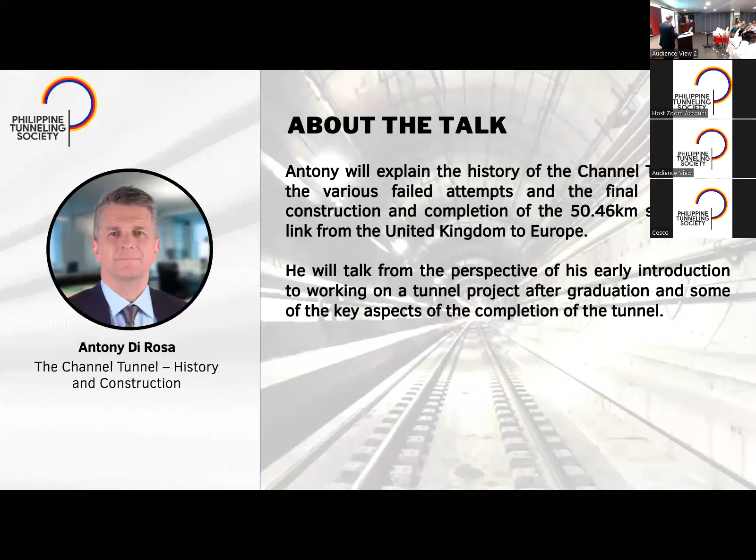That was my vision of the Channel Tunnel. A couple of platforms, a hole in the ground. So that's why I thought it didn't really require that many people to work on the project. Little did I realize the immensity of the project I was going on to. The scale of it, to this very day, it still remains one of the largest engineering feats of last century.

Right, just to give you a bit of an overview now. So it gave you an idea as well of how green I was when I graduated from university. Green, just like the Kent countryside, Garden of England, or as green as the jungles here in the Philippines. Very green and naive.

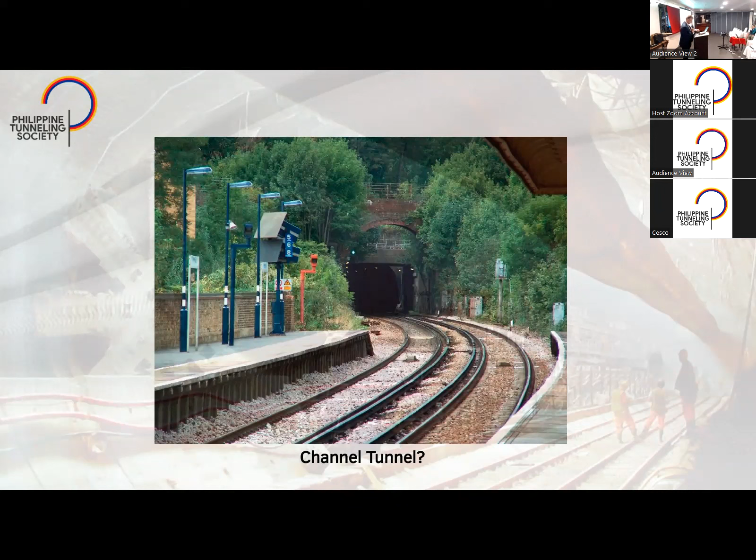For those who are not so familiar with the location of the Channel, it's actually an arm of the Atlantic Ocean, located between France and England. The closest point between France and England is about 33 kilometers, near Dover and Calais. It suffers from strong currents, which also affect the ferry crossings in adverse weather conditions. It's a pretty tough environment to sail, and it's been a focus of attention in terms of bridging between mainland Europe and England for trade purposes.

The top left-hand corner gives you an idea of the shipping traffic that goes through there. About 600 cargo ships and about 60 ferry ships travel through on a daily basis, not to mention the tourist boats that go out on the weekends. So very heavily trafficked and impacted by the adverse weather conditions. Top right gives you an idea of the proximity between France and England. You can actually see across the water on a clear day. It's just a matter of going underneath it.

And in 1909, bottom left-hand corner, Mr. Blériot flew across the Channel. And you get the occasional people who like to swim it as well. That's a bit of a personal challenge. That's not me, I can assure you. The other means of transport was the hovercraft as well.

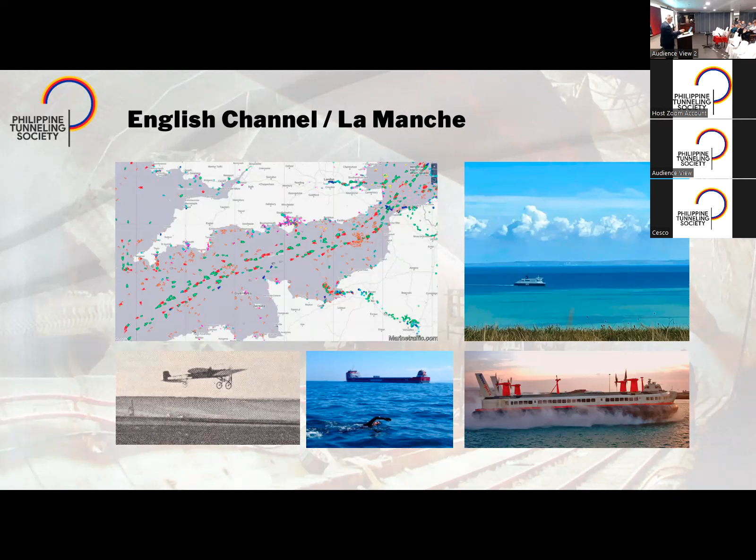Right, so on to a bit of history now. It's been a project that has been in the minds of people for a few hundred years now, dating back to as early as 1750, with the Academy of Amiens that launched a competition. It was won by a French engineer at the time, but nothing actually came of it. It sort of died a bit of a death.

1802 was the next one that was tabled, and this was to actually dig a tunnel underneath the channel, under the seabed, with horse-drawn carriages. And there were going to be two tunnels. One tunnel to deal with the traffic, and the other tunnel underneath to accommodate the water that would be seeping into the tunnel. Wild? Maybe not. I don't know.

Anyway, that was proposed and presented to Napoleon, but I think at the time there were still a few differences between the countries. So I think England felt quite exposed. You have to think as well that this channel represented a good line of defense to the country itself.

1856 was the next one. That one took on the same principle as before. It was going to be two tunnels. And the solution was going to be proposed where there'd be a meeting on an island between France and England. That one, if I'm not mistaken, was backed by a number of the banks, the Rothschilds, and thousands of investors, and was actually, well, actually, there was the next one.

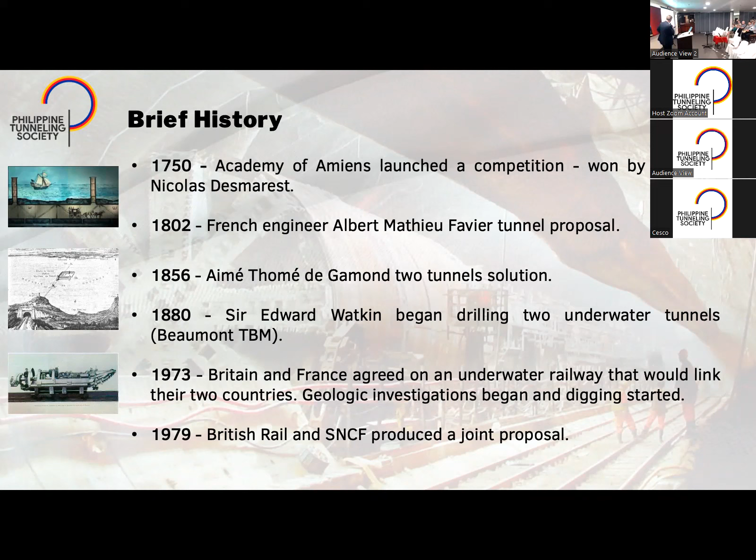Then there was another attempt in 1979. The two national railway companies put themselves together to propose a solution, but that didn't materialize either. So there have been many attempts over the years, but eventually in 1984, the British and the French governments decided that they really needed to get something built in order to improve the trade between the two countries.

So they launched a competition. There were 9 solutions presented. 4 were shortlisted, and the eventual winner was what was called Eurotunnel, the group called Channel Tunnel Group and France Manche SA. And that was the solution of the tunnel for the train and shuttles. There were various other solutions: a suspension bridge, a combination of bridge and tunnel, and a tunnel which was a road and a railway.

So in 1986, the Treaty of Canterbury was signed, and that effectively laid down the legal, financial and administrative basis on which the project was going to move forward. One of the key things here is that there was going to be no government or public funding whatsoever. So this had to be entirely privately funded.

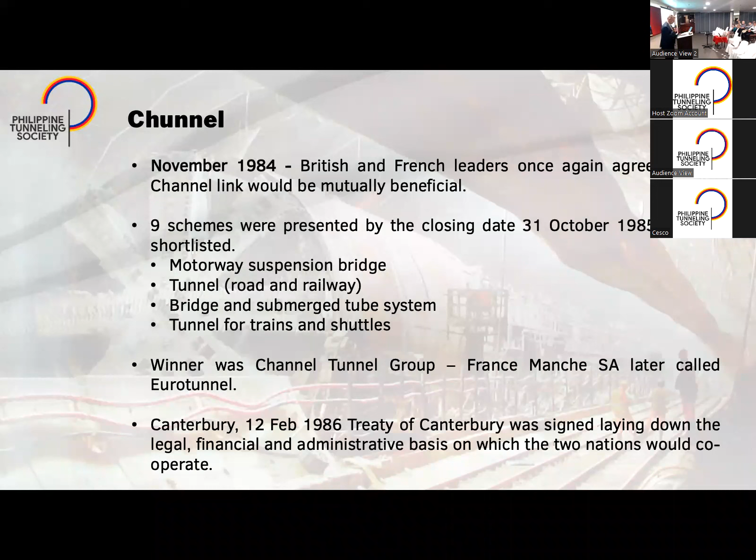So, the project location now. As I indicated before, the project is located between the northwest of France and the southeast of England, Kent and the Pas-de-Calais, fundamentally different in terms of their geographical layout and topography. Northwest of France, fairly flat. And from a population perspective, it really wanted to attract the tunnel to that part of the world, because they saw it as an opportunity to create employment. There were high unemployment rates in that heavily industrialized area, and they wanted something like that to regenerate the industry.

Southeast of England, in contrast, was fundamentally different in that it's hilly, there are cliffs, as you can see from the pictures here, the White Cliffs of Dover, and Kent is called the Garden of England, and you'll see from these pictures that there is a good reason. It is a very picturesque county, and it was heavily opposed for a variety of reasons. One was the threat to the ferry industry and the people employed in it. They felt they were going to be undermined. The other was the environmentalists, because they envisaged that this tunnel was going to destroy the beautiful English countryside.

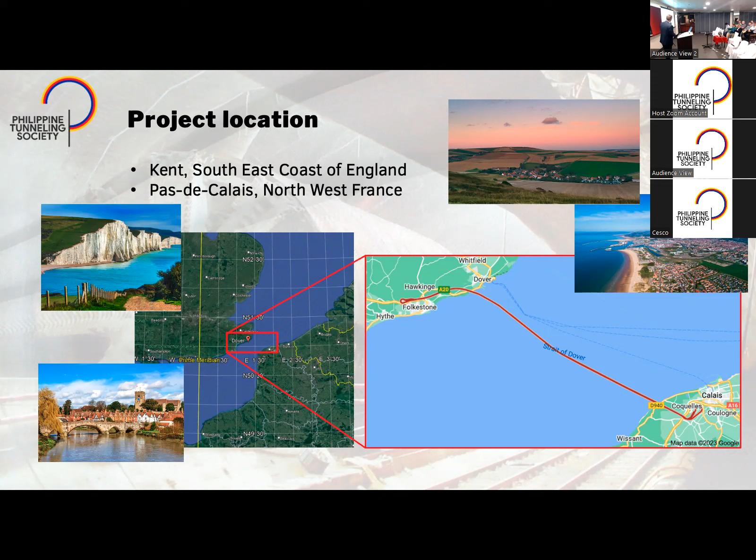Okay, so the winning group was the Eurotunnel group, which had to be primarily an Anglo-French cooperation, since both governments were supporting this. They had to get French and English banks, as well as the contractors from both sides of the water.

So originally, the group was one, and they eventually realized that they had to separate the owner-operator from the actual contractor because there was a potential conflict of interest. So what happened then was the creation of the Eurotunnel group, which would be the ultimate concessionaire for 55 years initially. And the actual contractor was a series of contractors from France and England: Translink from the English side and Transmanche from the French side, giving TML, Transmanche Link.

They were overseen by the Intergovernmental Commission Safety Authority. They were there to primarily make sure that the safety standards, the design, the operational aspects were respected. And so they also employed the maître d'œuvre. The maître d'œuvre is effectively the engineer, to make sure that the technical requirements were actually met, bearing in mind that this is a design, build, operate, and transfer project. So it was designed progressively as the project went along.

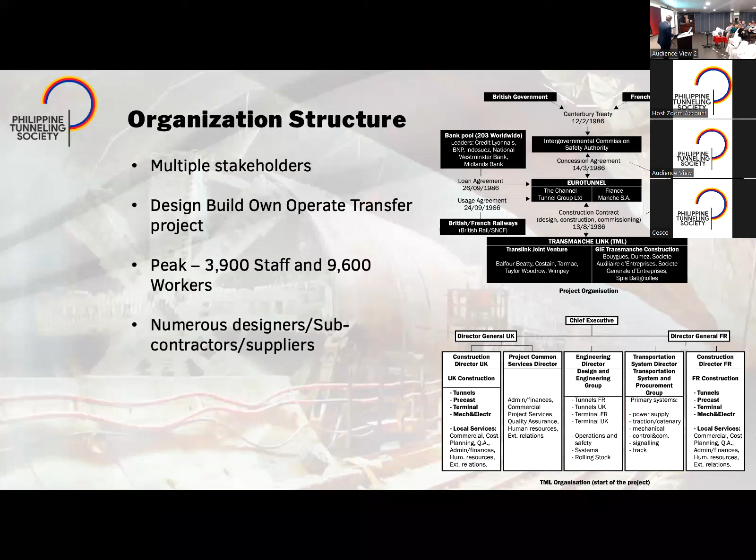I started in 1987. It was still a very small organization, and it gradually grew after that into this enormous project. And as you can see, there are numerous stakeholders, numerous interfaces, numerous interests that had to be maintained progressively as the project went along, and obviously that was part of the challenges of the day-to-day we were having to deal with. I was a young engineer, so my main focus was primarily on-site, with the theodolite, working with the subcontractors and the contractors. So I didn't have that level of contact at the higher levels anyway.

So in terms of the actual tunnel itself, I'm going to ask you to pay attention because I'm going to ask you a question later on. Well, I'm going to challenge you and see whether you paid attention.

The tunnel itself is the third longest tunnel in the world, after the Gotthard tunnel in Switzerland and the Seikan tunnel in Japan. However, it does hold the record for the longest underwater section. So the key thing to remember here, it is not in the water, it's not suspended in the water, it's actually under the seabed, running through at anywhere between 45 to 115 meters below the seabed. The deepest section of the channel is the Fosse Dangeard, 85 meters deep, which is above the line of the tunnel itself.

The geology that was really identified as the ideal tunneling medium is a chalk marl, which is effectively like a chalk, but with traces of clay and silt in it. Ideal for tunneling. The English side suffered less in terms of fissured rock and water ingress, but on the French side, there were actually incidences of water ingress and high pressure, which had to be dealt with. Hence the different tunneling methods used on both sides. On the English side were open face TBMs, whereas on the French side were EPBMs.

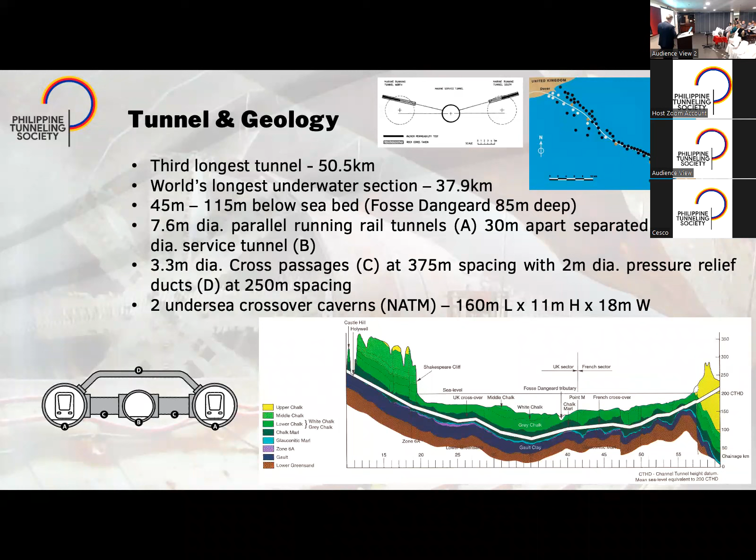Right. In terms of schedule, when you realize what was actually built in this time, the immensity of it, not too dissimilar to some of the projects being talked about at the moment in Manila, like the North-South Commuter Rail, in terms of 7 years or so. This was actually built in 8 years. So here we're talking about design, procure, build, test and commission, and then a fully operational tunnel system at the end of it.

And I had the fortune of working on it from 1987 through to 1994. Key thing to look at here is the overall layout of the transport system. Left-hand side, you have the Folkestone terminal, which is where the shuttle trains loop around, come and unload and load the vehicles, the trucks, passenger cars, and so on. Shakespeare Cliff was effectively an operational area that was used to start the tunneling seaward bound and also landward bound. Moving along, you have the crossovers in the tunnel.

Sangatte shaft, which was the equivalent of Shakespeare Cliff but on the French side, slightly different configuration and setup, but it was also the operational shaft from which they did the tunneling seaward and landward. And then the Cocquelles terminal, which was effectively the same as the Folkestone terminal, except that here this was more in open land.

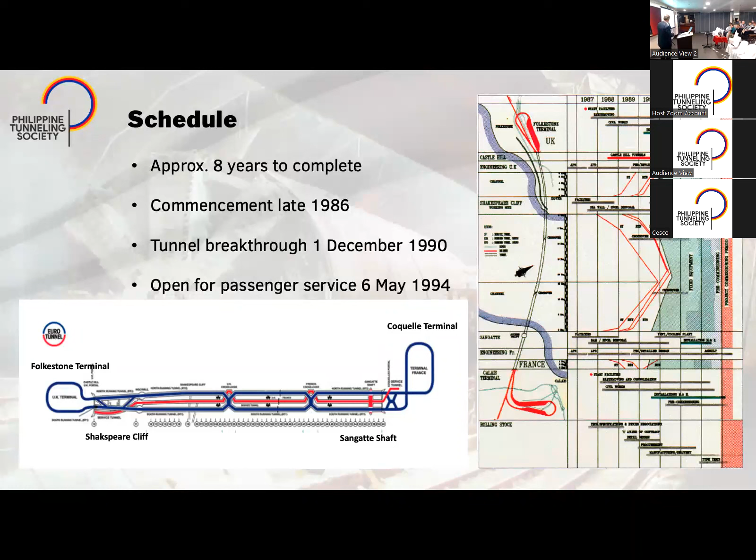Okay, so one of the key aspects that really made the success of the project, apart from the tunneling itself and the crews, was the supply chain, and that is paramount in these types of projects: to make sure that your supply chain is on top of the game and it's not holding up the TBMs.

The tunnel segments were fabricated in two areas, one on the English side at the Isle of Grain, and the other one in France near the Sangatte shaft. I'll go to the French one first. Sangatte was probably easier to build the facilities because of the lay of the land. It was very close to the shaft. You didn't have that many logistics issues in terms of transporting the segments to the tunnel. Whereas on the English side, the challenges were a bit greater.

As I said, Southeast England: hills, tight spaces, cliffs, and so on. Very difficult to have a setup like you can see on the top right-hand corner, which was the Isle of Grain facility, 8 production lines producing over 1,000 units a day. So it was decided to make use of the available land of the Isle of Grain. Aggregates were shipped from Scotland by ship, and then the segments, when they were constructed, were transported by train, because adjacent to the site itself was a railway line.

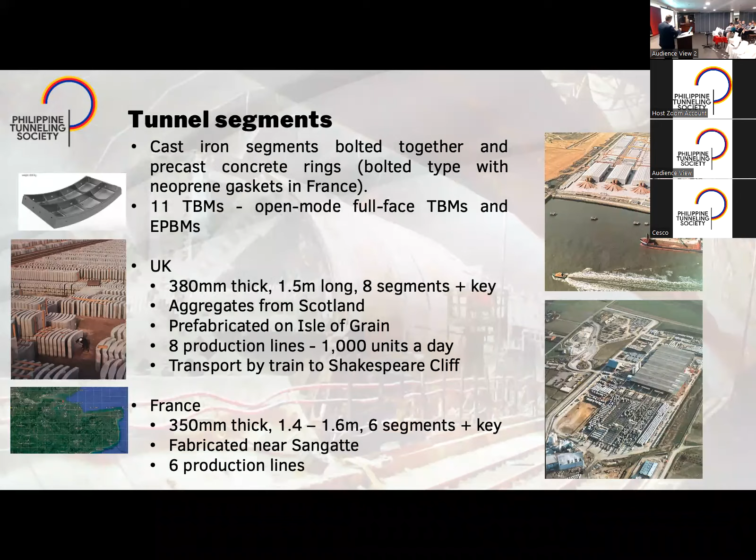The two main operating sites that I highlighted earlier on were Shakespeare Cliff and Sangatte. Shakespeare Cliff made use of the original site that had been set up in the 1880s, which had partly been created to do the original tunnel dig, and then was subsequently also used for the 1974 one.

But this had to be expanded because of the amount of space and equipment that had to be used and delivered to the site, meaning that at Shakespeare Cliff about 1.8 kilometers of land in length was recuperated. A seawall was built, and the tunnel spoil was used to fill this site to then build the pit head above the ground, as you can see there, top right-hand picture. Top left-hand picture is Shakespeare Cliff during the earlier stages.

The top of the cliff was the site offices. To the right-hand side of those site offices was the accommodation for the workers. Thousands of workers working on the project; they needed to be within close proximity of the tunnel. From a logistics point of view, those going from the top of the cliff accessed the tunnel through a shaft about 115 meters deep. So it's a complex underground system, interwoven tunnels that had to deal with ingress of materials, plant, movement of trains, spoil removal. It was a very impressive structure.

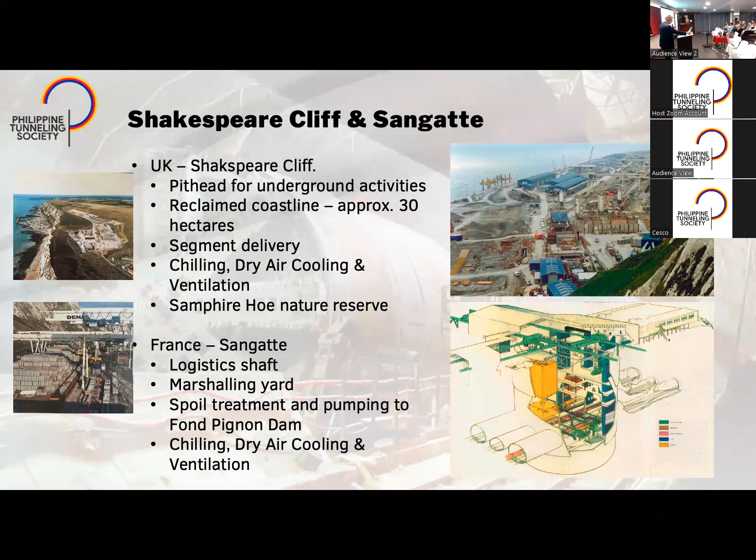You may recall I mentioned as well the Folkestone and Cocquelles terminals, and these are effectively the terminals located at either end of the network for this transport system. This is where the vehicles were loaded and unloaded, and the trains passed through. And here are located the substations to power the tunnel.

The thing to notice here as well is that both sides of the tunnel were powered by these substations, but in case one of the substations went down, the other was able to provide the necessary power to the traction system for the trains, as well as the auxiliary services, which were the ventilation and cooling.

The interesting aspect of this particular site in Folkestone was that when I started there, they had to raise the land by about 6 meters, and to avoid a logistics nightmare in what was effectively an inhabited area, you could see to the left-hand side was Cheriton, they decided to pump sand, which was dredged at Goodwin Sands. It was brought in by barge, and a very large pipe pumped the sand into that area to build it up to the right level, and then the water was drained off. So it was pumping up about 65 meters in difference in level.

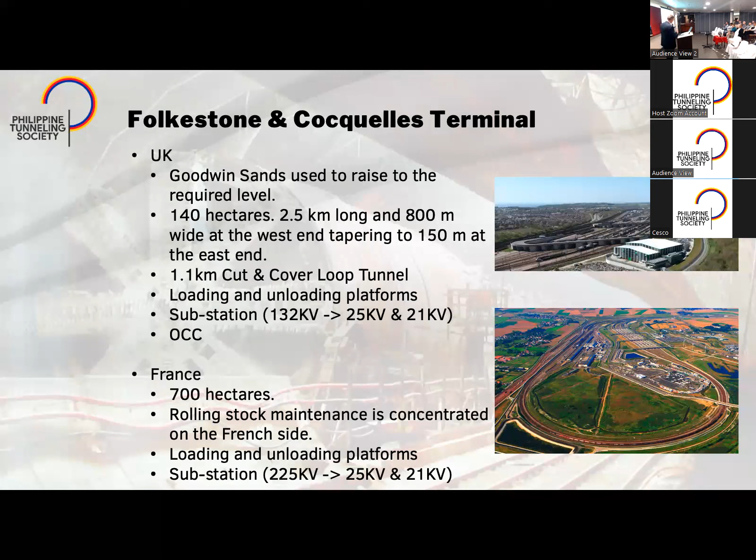So not to underestimate some of the systems that go into the tunnel. In order to ventilate and cool these tunnels, there are some very large fans either side, and a very large cooling system as well. Another one of the projects I actually worked on. This was the benefit as a young graduate engineer: you're moving around the different projects within the overall program in the space of 6 years, because generally they're about 1.5 to 2 years.

I also had the benefit of working on the commissioning of the pumping stations that were designed to evacuate water in case the tunnel flooded. So I used to cycle out to the middle of the channel, in the tunnel, clearly, to oversee and interface with our French counterparts for the commissioning of the substations. And all these various technologies, systems and rolling stock are controlled by two operation and control centers either side of the tunnel.

Now, you can imagine, to get this up and running in such a short space of time, the sheer number of subsystems and the overall system had to be working. There were about 900 different subsystems that needed commissioning to make it fully operational. And we had to go through the various phases: commissioning of the subsystem, then dry run, wet run, and then the full operational tests, which was quite a complex process.

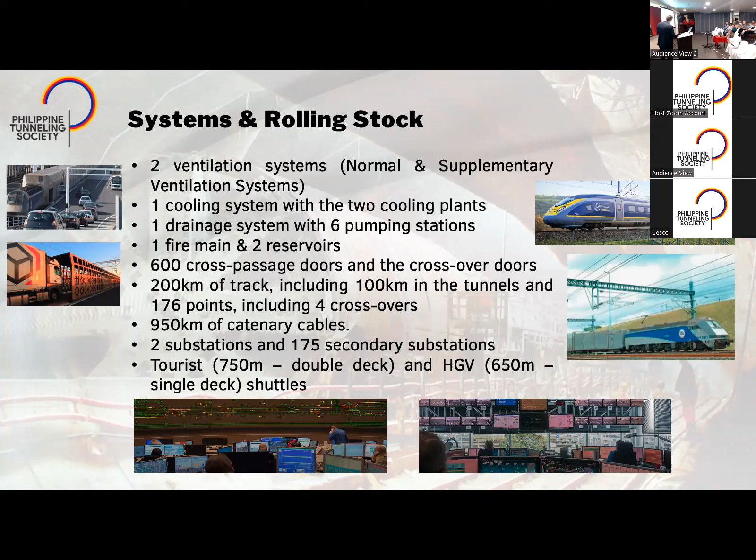So, just to, and I've flown over this, but it's a very large project, as you can imagine, but all this for what? This is the trains running through a tunnel up to 160 kilometers an hour with a headway of three minutes. So tunnels are important, but you also have to look at the actual overall system itself, okay? Typically now, there are about 400 trains traveling every day through the tunnel.

The latest information that I have as well is that Getlink, who are the actual concessionaire, now for 99 years, not 55 any longer, the concession was actually extended, is that they're looking to actually pass over 1,000 trains through the tunnel.

The other thing that has been useful is that this tunnel actually is the medium through which they've fed cables to actually transfer power between the two countries. And this effectively has been a source of revenue for the concessionaire. This wasn't there originally, but as I mentioned, with tunnels now you can extend the purpose of it and actually rent out space to other entities.

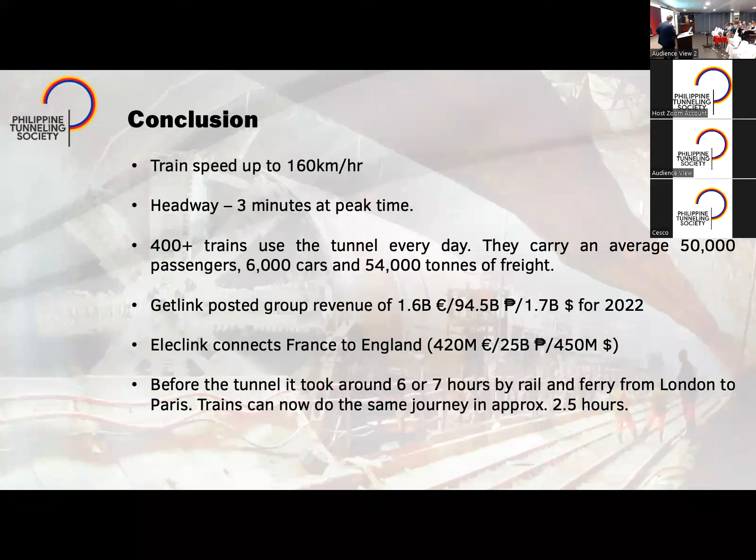So, as mentioned there, 6 to 7 hours to get from Paris to London or the other way around. Now, about 2.5 hours of the actual benefits. And the trade invariably between the two countries and Europe has increased, notwithstanding Brexit and COVID. And this is what it looks like when you travel through the tunnel.

No? No, okay, right, okay.

So, as a young graduate engineer, I was actually invited to a public information evening which members of the public attended, and we were meant to be informing them about the progress of the tunnel, the purpose it served, and so on and so forth. And I was approached by a member of parliament whose first question was, well, when I'm traveling through the tunnel, will I be able to see the fish?

I had to be polite. I said, if we see the fish, we've got a problem. Anyway, I thought it was also to see whether you were paying attention as well when I mentioned that it's actually under the seabed.

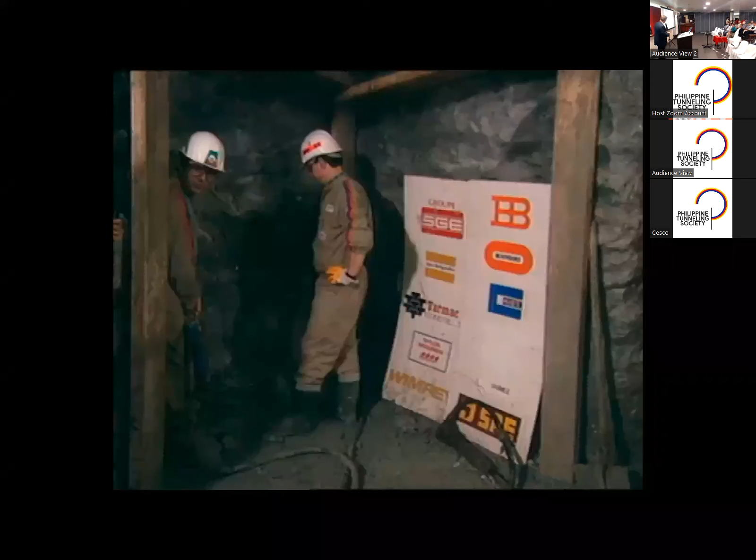And this, when I watched it earlier on, it actually brought a bit of a lump to my throat. It did bring back a few memories.

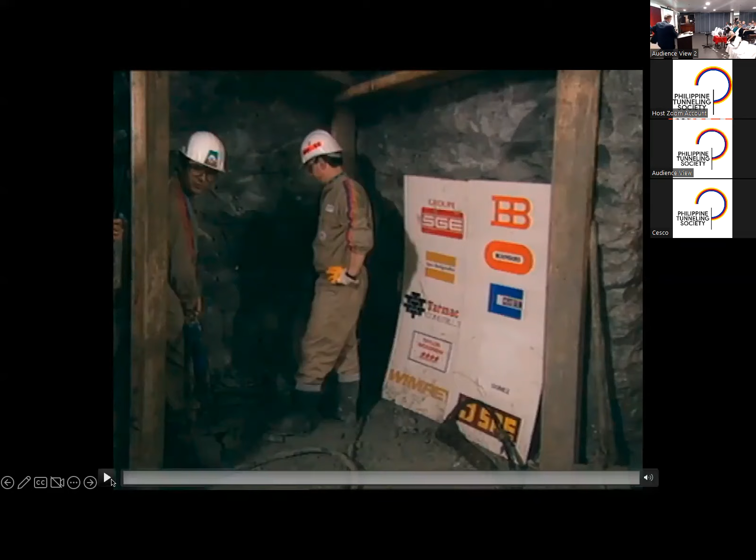At 12 minutes past 11 this morning, we watched French tunneler Philippe Cozette pick up his drill.

It was working fine, wasn't it, earlier on? It was, wasn't it? Do you want to?

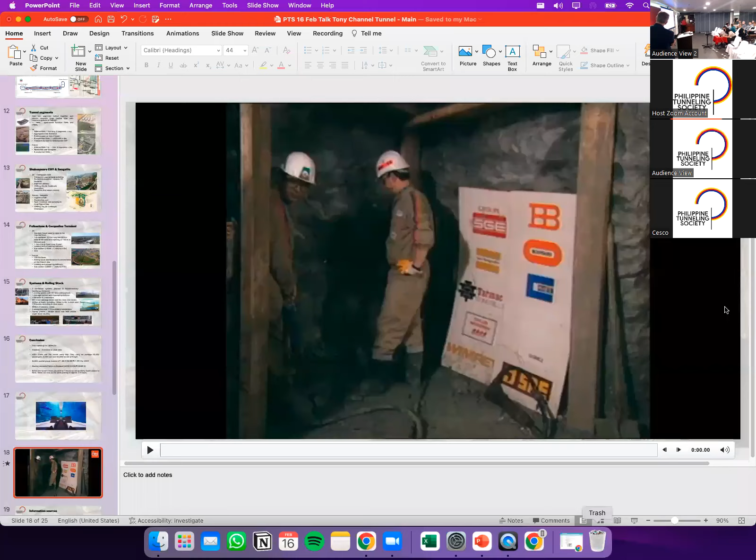At 12 minutes past 11 this morning, we watched French tunneler Philippe Cozette pick up his drill. On the other side of the wall, of chalk only a few inches thick, his British counterpart, Graham Fagg, was drilling too. We knew they were making history, watched live on ITV, by breaking through the wall between the British and French sides of the tunnel.

On the other side, his British counterpart, Graham Fagg, was drilling too. We knew they were making history, watched live on ITV, by breaking through the wall between the British and French sides of the tunnel. They're through, they're through. We've all been waiting for Mr. Fagg and Mr. Cozette. The French

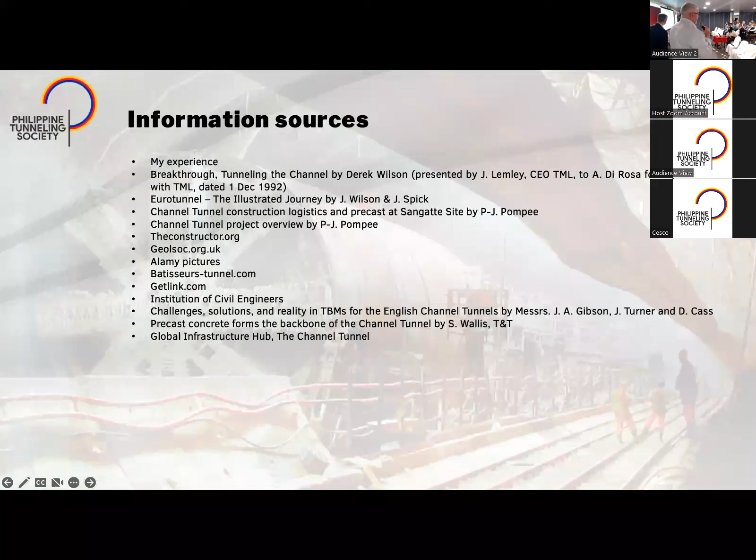What type of equipment did you use? Oh, yeah. All I remember, the manufacturer ABB Fläkt were the actual ventilation fan providers. But I can assure you I did. Yeah. And honestly, I can't remember the specs of the actual equipment, but certainly the actual provider of those fans.

There were two parts. Go back here. There was the ventilation building down on Shakespeare Cliff, and then there was the utilization of the north ventilation shaft, which actually made use of the original access shaft, in which the fans were then installed. But the actual spec of the equipment, I would have to feed that to you on a separate note.

Just a quick question. Were all the TBMs left inside, or did you take any out again? So interestingly, the English TBMs, from what I recall, were actually driven off to the side of the tunnel and left underground. The French ones were recovered. I think one of the French ones is actually sitting off a roundabout somewhere up in that area there, so you should be able to see it. I think it's a service tunnel TBM.

So we have a program for technical talks over the year. We're starting to get some slots already put forward. Iwata-san did say that he would do something, so we've got him down to do some tunneling in Hong Kong, mixed ground and so on. And then there's an interesting talk in April from Brian Shepstone, who's going to talk about his experiences with bombs in Hong Kong and how to deal with them in excavations and in construction. But we still have a few slots available later in the year. So please let us know if you want to give a talk to the Tunneling Society.

You probably remember Noda-san gave us a presentation last year on the Davao bypass. It's taken a bit of time, but we've managed to get a slot to take some people down to go and see that construction project. So we're organizing a visit to leave on Friday the 10th to Saturday the 11th to go down into the tunnels and get a tour around the project site.

The places are limited to only 15 to 20 people, so first come, first served, and the price will be approximately 5,000 to 6,000 per person. We're not sure yet whether we're going to book the flights for everybody, because you might want to do something different. But for the accommodation and the transport, we've got that all organized. And then maybe in May, we're going to try to organize a visit to Corregidor, to the Malinta tunnels, to go and see those historic World War tunnels.